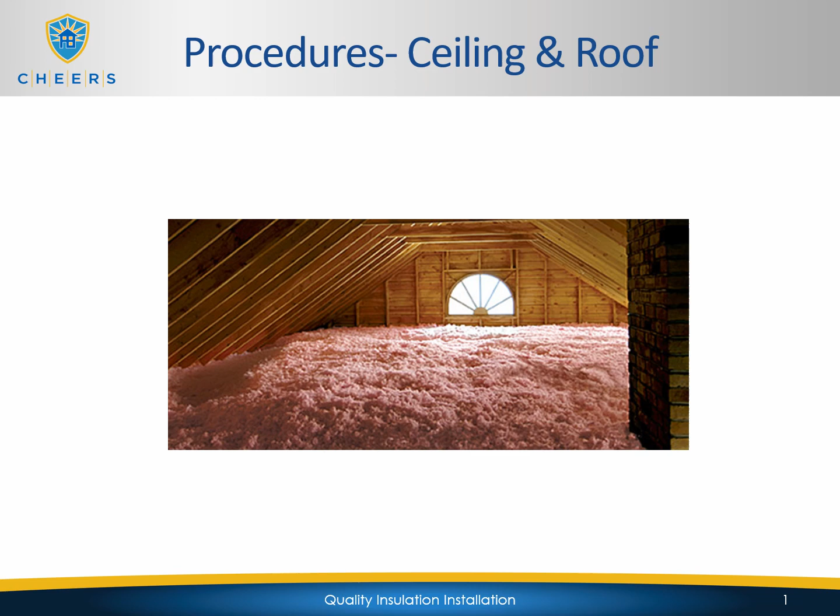As far as air sealing is concerned, hard covers or draft stops shall be placed at ceiling level over all drop ceiling areas, interior wall cavities and chases, and double walls or bump outs to keep insulation in place and stop air movement to and from unconditioned space. If hard covers or draft stops are missing or incomplete, they shall be completed before insulation is installed.

Fire caulking would be used to seal the flue to the actual draft stop itself.

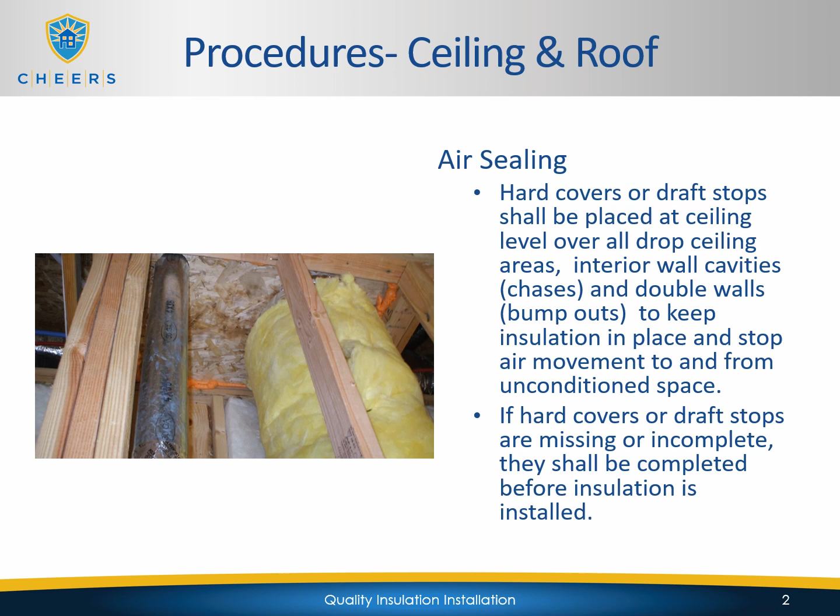Any penetration cut into the ceiling are sealed to the surrounding drywall. This includes, but is not limited to, electrical boxes, fire alarm boxes, fire sprinklers, HVAC boots, and exhaust fan housing, including all holes and seams in the housing itself.

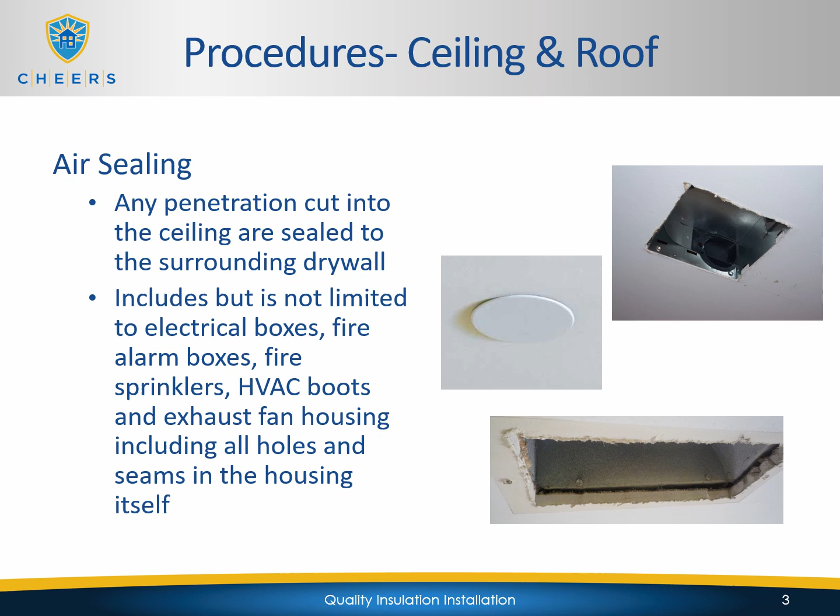If you're dealing with an unvented attic, there is a continuous air barrier at the roof deck and gable ends. All penetrations must be sealed. So if you're working in a house that has an unvented attic, the whole attic has to be completely sealed from the outside of the house.

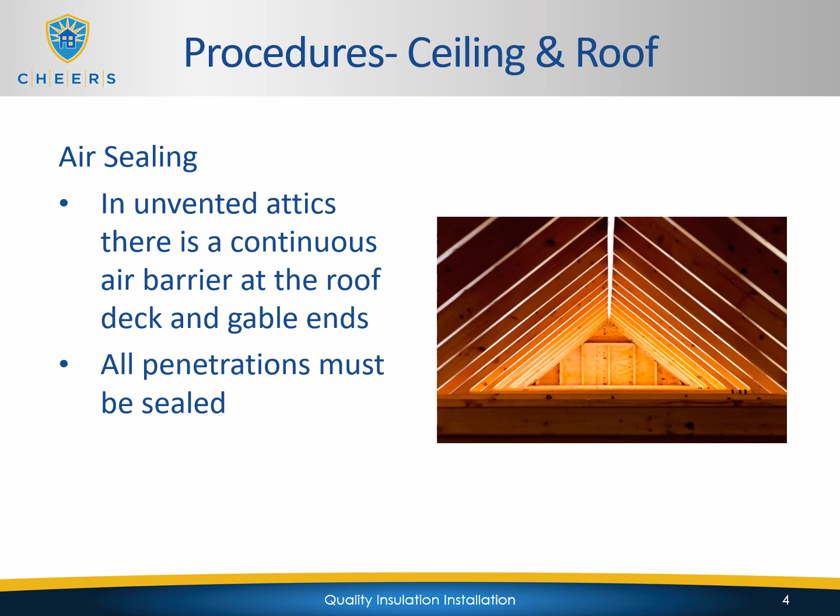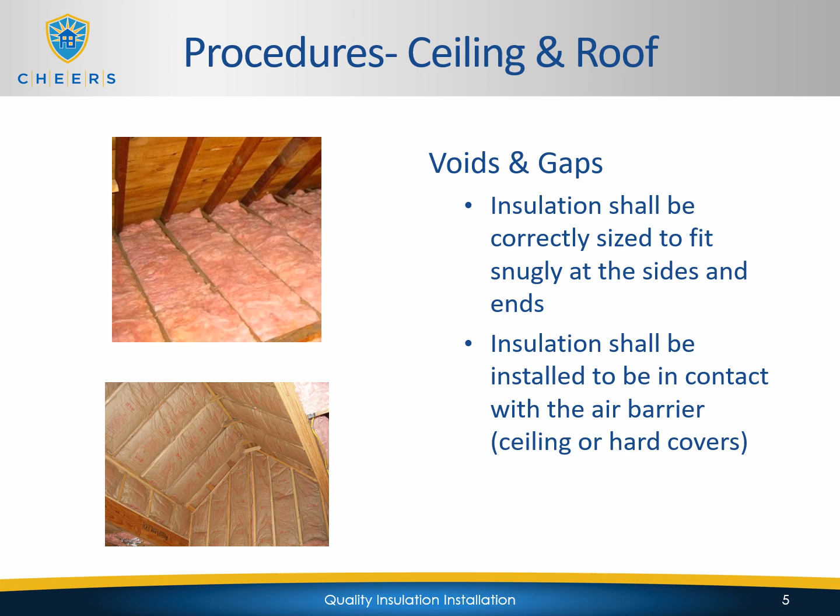Insulation shall be applied all the way to the outer edge of the wall top plate and flush against any ventilation dams or baffles. Rigid board insulation installed above the roof deck shall be applied to the outer edge of the plane of the top wall plate. Obviously, because you want to extend the insulation the furthest out as possible of the house.

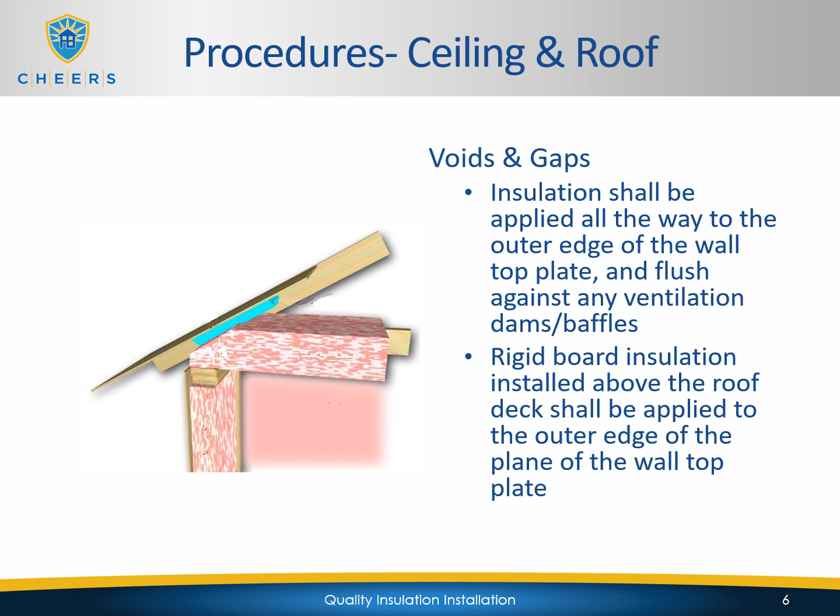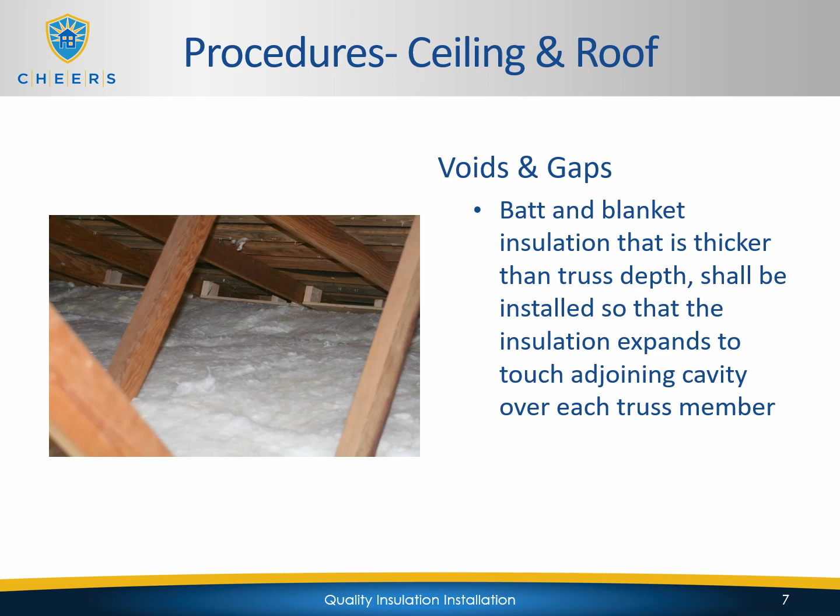For compression, where necessary, batt and blanket insulation shall be cut to fit properly. There shall be no gaps, nor shall the insulation be doubled over or compressed. When batt and blanket insulation are cut to fit a non-standard cavity, they shall be snugly fitted to fill the cavity without compression.

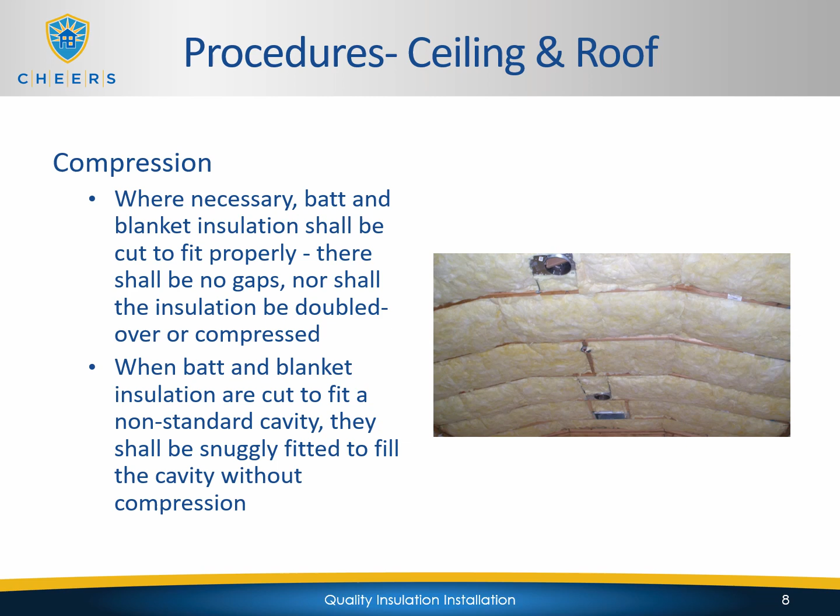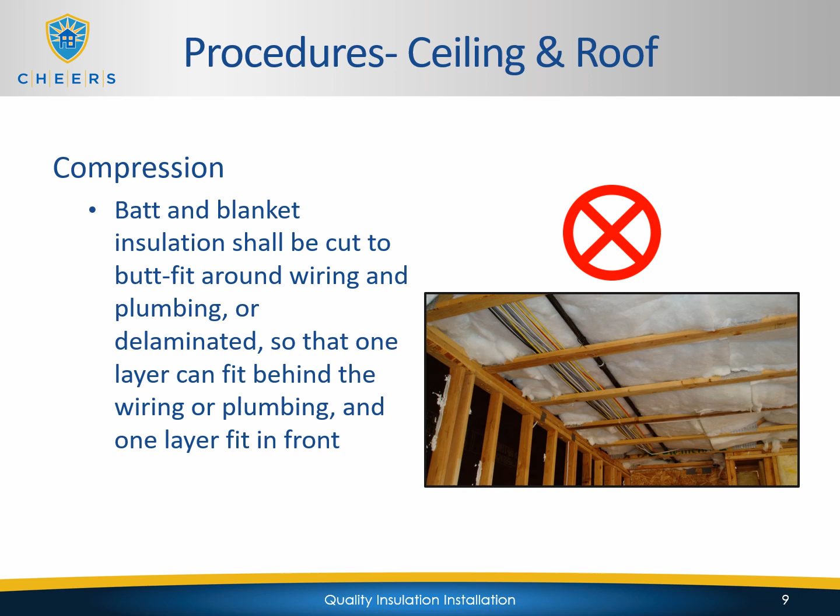Baffles shall be placed at the eaves or soffit vents of vented attics to keep insulation from blocking eave ventilation and prevent air movement under the insulation. The required net-free ventilation area shall be maintained.

So the baffle does two things. We talked about this during the Title 24 overview section. The baffle keeps insulation from covering the vents, but at the same time, it keeps the ventilation from the vents from disturbing the insulation, mainly in the case of loose fill insulation. So nonetheless, baffles have to be present, and the insulation cannot block the actual vents.

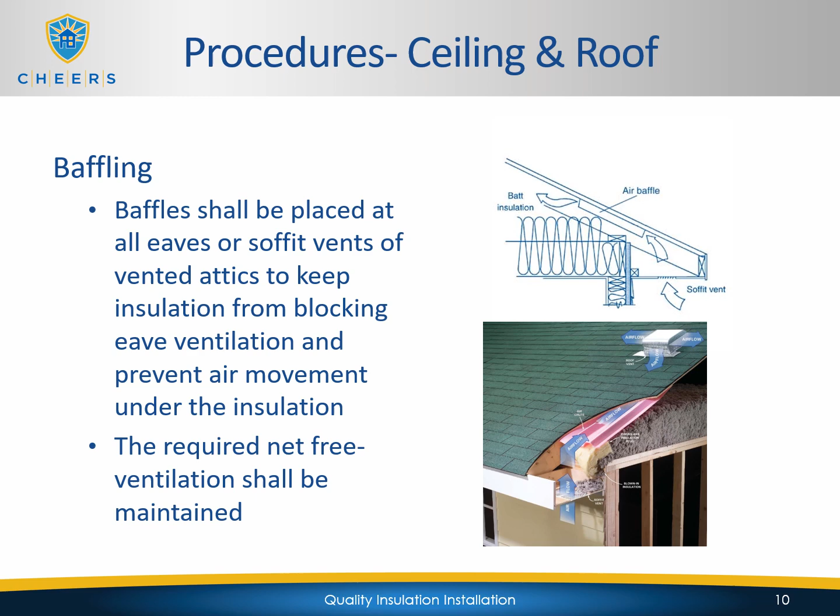Recessed light fixtures shall be rated as insulation contact and airtight, IC and AT. They shall be sealed with a gasket or caulk between the light housing and the ceiling. Insulation shall cover all recessed lighting fixtures to the same value as the ceiling. If not, an area weighted calculation is required.

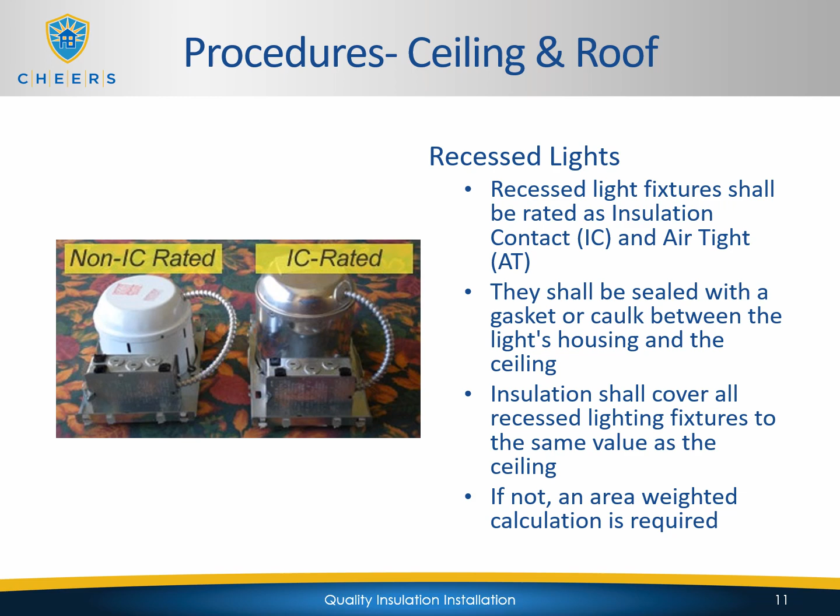Again, for chimney and flue baffles, insulation shall be kept away from combustion appliance flues and chimneys with sheet metal flashing: 1-inch distance for double wall flues and 6-inch for single wall, or in accordance with the flue manufacturer installation instructions or labels on the flue. The flashing shall be sealed to the surrounding framing with fire-rated caulk.

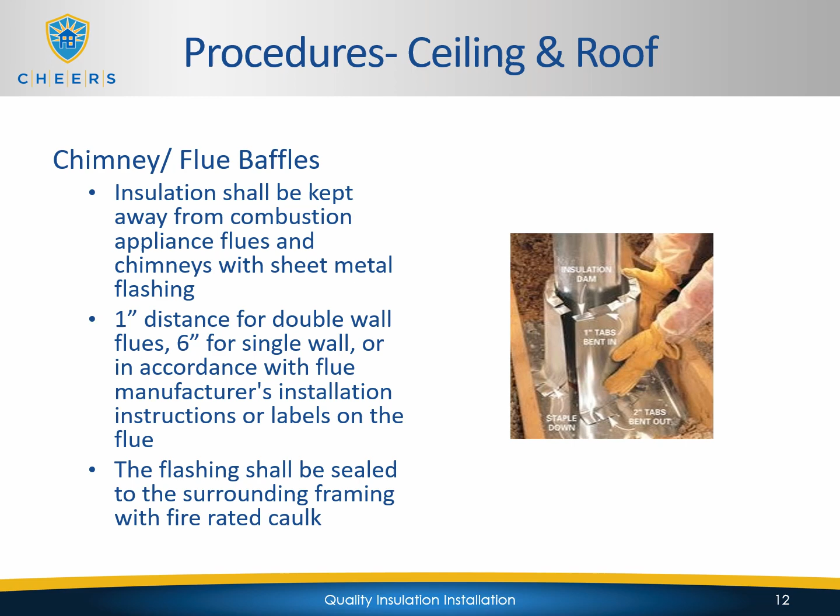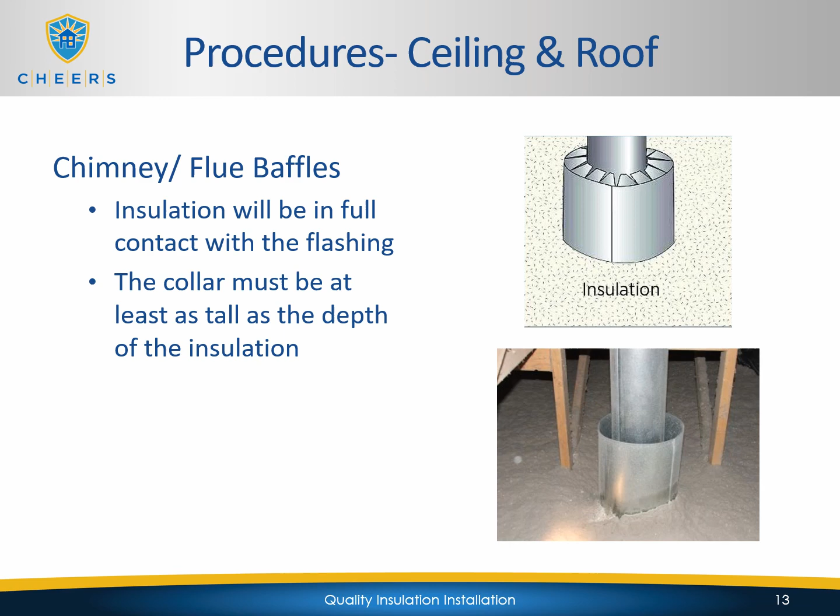When inspecting blown-in insulation, there have to be attic rulers appropriate to the material, installed and evenly distributed throughout the attic to verify the depth of the insulation. The rule is one ruler for every 250 square feet, clearly readable from the attic access. Attic rulers shall be scaled to read inches of insulation and the R value installed. You'll find these rulers throughout the attic to verify that the insulation being installed meets the inch per R value requirement.

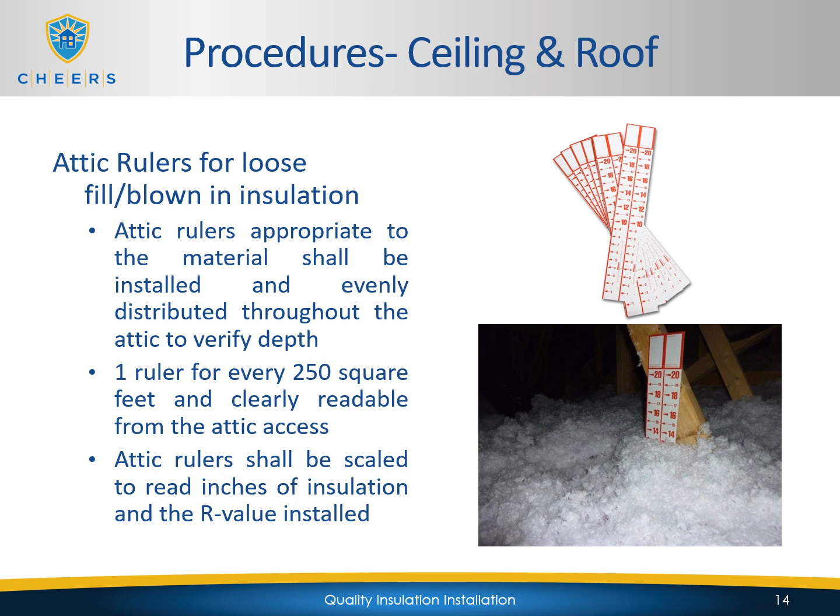For blown insulation, it shall be blown to a uniform thickness throughout the attic, with all areas meeting or exceeding the manufacturer's minimum requirements for depth and weight per square foot. So the insulation, when blown in, has to be somewhat even throughout the attic. It cannot be big waves. The picture you see here is a very good example of what blown-in insulation should look like in an attic. You can see the attic ruler is installed as well.

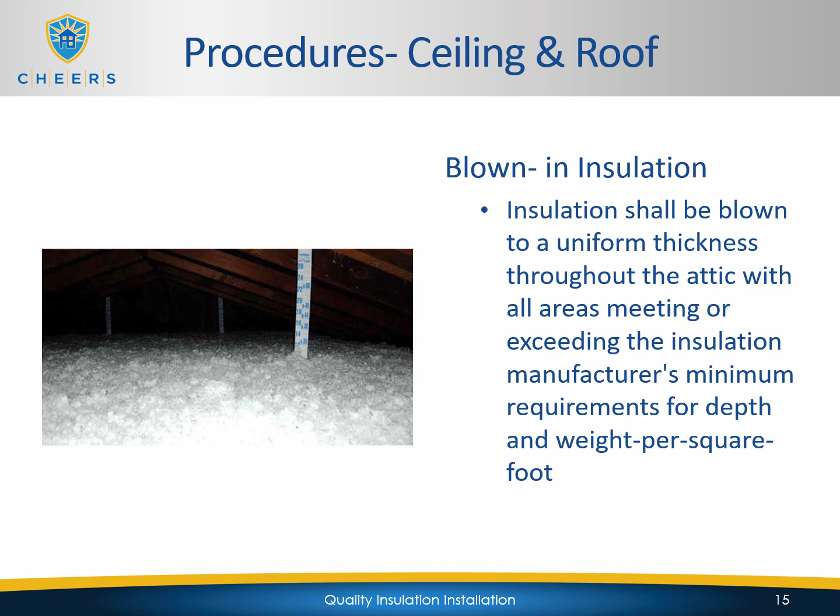So how do we measure blow-in thickness? The HERS rater shall verify that the manufacturer's minimum insulation thickness has been installed. For cellulose insulation, this verification shall take into account the time that has elapsed since the insulation was installed. At the time of installation, the insulation shall be greater than or equal to the manufacturer's minimum initial insulation thickness.

If the HERS rater does not verify the insulation thickness at the time of installation, and if the insulation has been in place less than 7 days, the insulation thickness shall be greater than the manufacturer's minimum required thickness to achieve the given R value at the time of installation, less half an inch to account for settling. If the insulation has been in place for 7 days or more, the insulation's thickness shall be greater than or equal to the manufacturer's minimum required settled thickness to achieve the given R value.

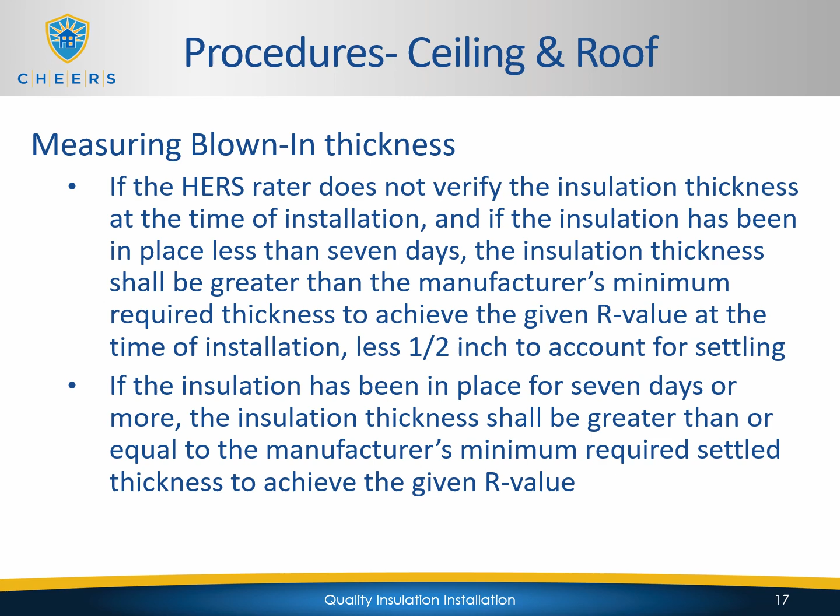The HERS rater shall verify that the manufacturer's minimum weight per square foot requirement has been met for attics insulated with loose fill insulation. Verification shall be determined using the methods of the Insulation Contractors Association of America, or ICAA, Technical Bulletin number 17 or 33. Only one sample shall be taken in the area that appears to have the least amount of insulation. The rater shall record the weight per square foot of the sample on the Certificate of Verification, or CF3R.

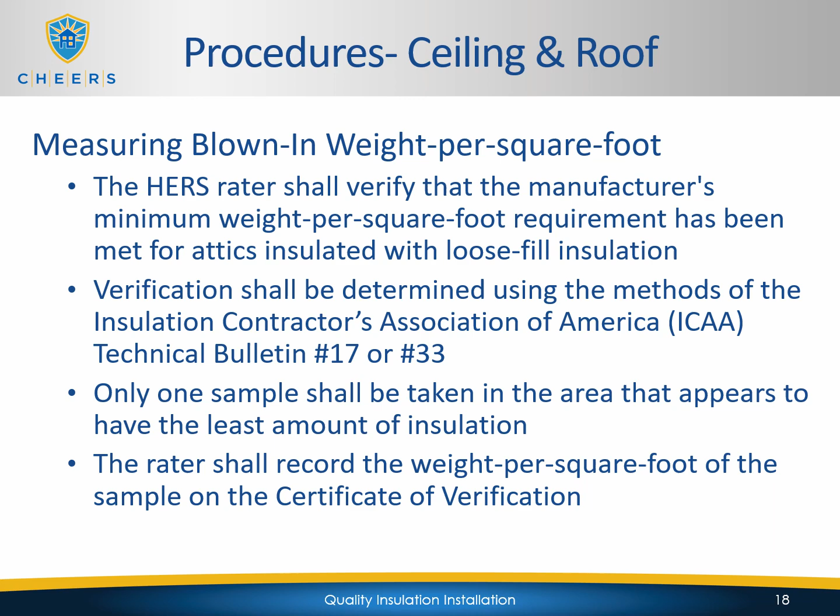The first thing you want to do is press the coring tool, also called a cookie cutter, into the insulation to its full depth. Try to avoid electrical wiring, plumbing, framing, and any other obstructions. Try to go into an area that will be completely flat at the bottom of the insulation with no obstructions.

In the pictures on the right hand side, you see the coring tool, and in the picture at the bottom, you see the coring tool pushed all the way down in full contact with what most likely was going to be the ceiling drywall from the room below.

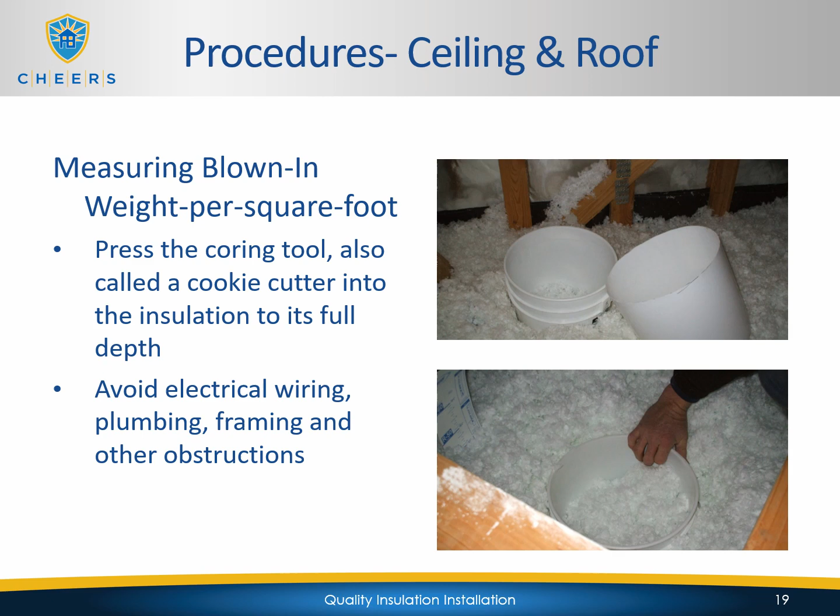You will then want to remove the insulation within the sampling tool and place it in a separate container. So you place the coring tool in the insulation, then take the insulation out of the coring tool while leaving the coring tool in the actual insulation itself.

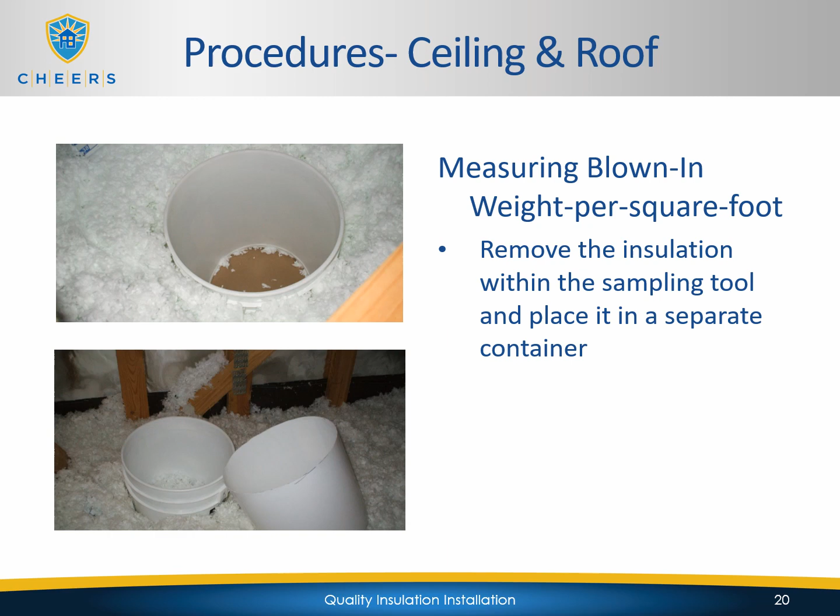You want to tare the scale with the empty sample container on it, then weigh the sample of insulation. You then want to divide the weight of the sample by the area of the coring tool in square feet.

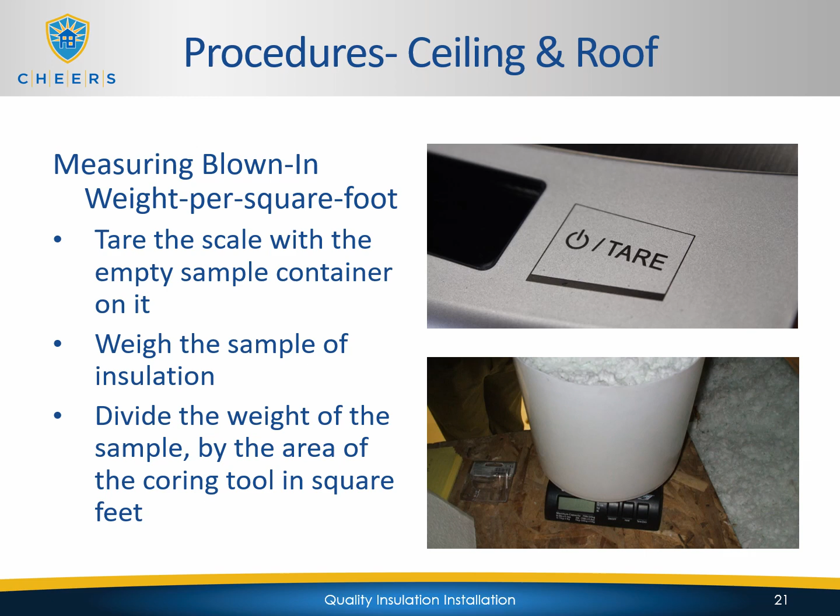Once you calculate your pounds per square foot, you will be able to compare that number to the actual manufacturer specs, which will tell you the actual R value for that insulation. The label you see here, by the way, is only a sample. This label is for example only. Each product will have its own unique specification based on the manufacturer, but it's just to give you an idea of how it works.

If you look at the fourth column down on the label, it says the minimum weight in pounds per square foot. If you go two slots down, it says 0.338. So if that was the weight you calculated off the scale, that would tell you it's an equivalent of an R19, as long as there's at least 7 inches worth of insulation there.

Again, keep in mind, this label is for example only. You would not use this label for all products. You would use the product-specific label for whatever product you're measuring.

So the measured weight per square foot or density must be greater than the manufacturer's specifications required to achieve the target R value on the CF1R. If the R value you verified matches or exceeds what's on the CF1R, you pass this particular verification.

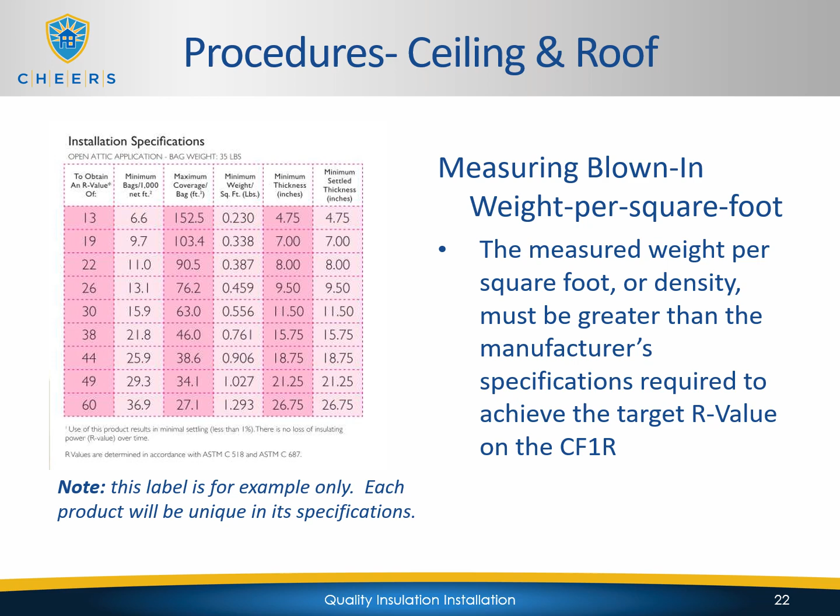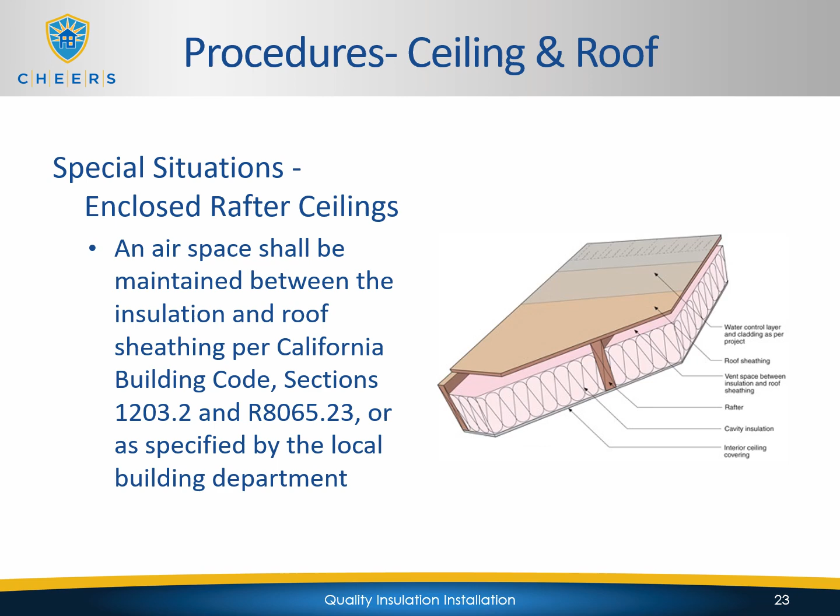As far as special situations for attics and cathedral ceilings, in unvented attics where insulation is applied directly to the underside of the roof deck, all gable ends shall be insulated to the same R value as the exterior walls as specified in the compliance documentation, CF1R, CF2R. In unvented attics where SIPs are the insulated roof structure, all gable ends shall be insulated to the same R value as the exterior walls as specified in the compliance documentation, again using the same forms we just mentioned.

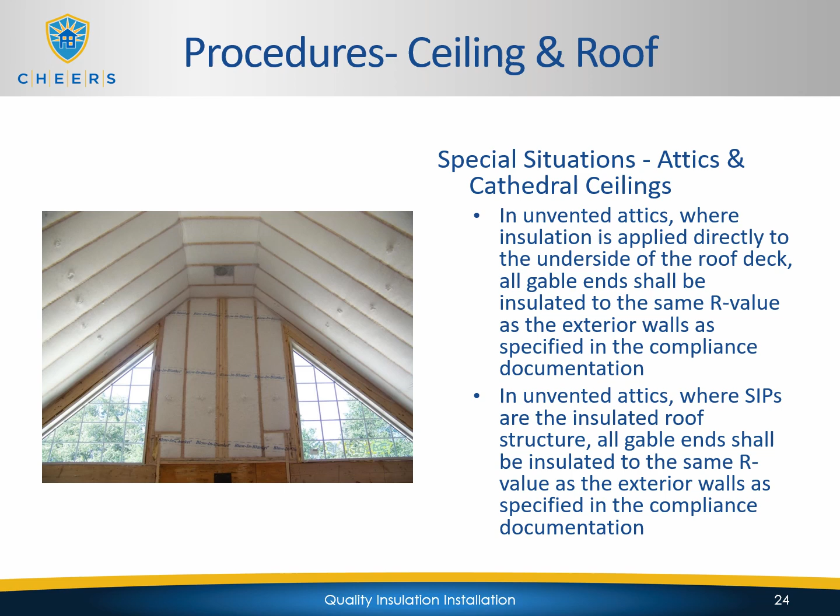For HVAC platforms, insulation shall be placed below any platform or catwalk for HVAC equipment installation and access to the same value as the ceiling insulation. Insulation shall be installed so it will be in contact with the air barrier, which is going to be the drywall. If not, an area weighted calculation is completed and turned in with a CF3R-ENV-23.

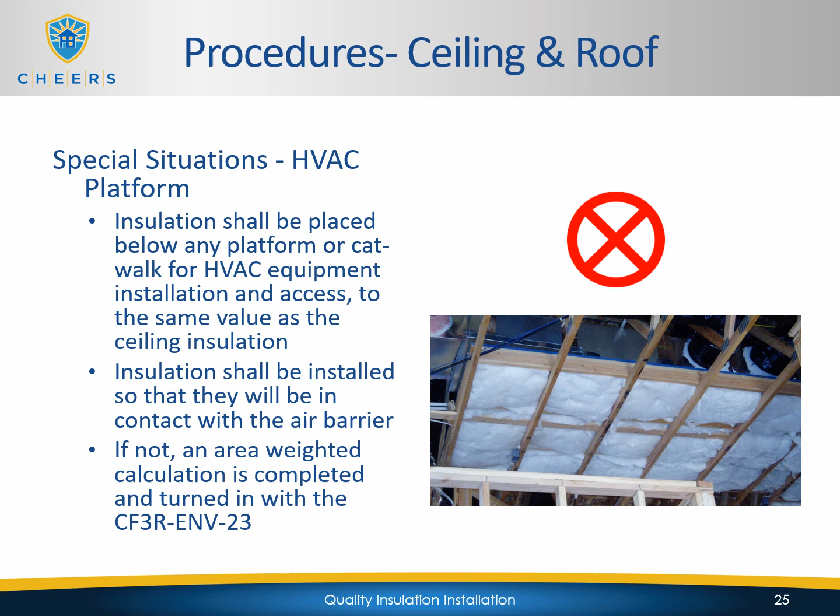For attic access, you want to permanently attach rigid board insulation, batt or blanket insulation with the same R value as the ceiling to the access door using adhesive or mechanical fasteners. The bottom of the attic access shall be gasketed to prevent air leakage of conditioned air to the unconditioned attic. Vertical access requires mechanical compression such as screws, latches, or doors.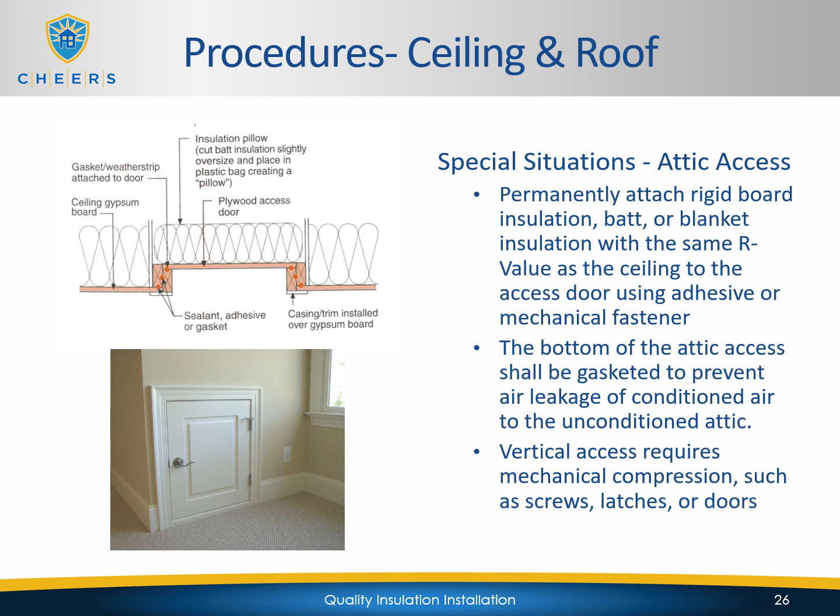The attic access must be surrounded with a dam at least the same depth as the insulation to prevent loss of ceiling insulation when the access is open.

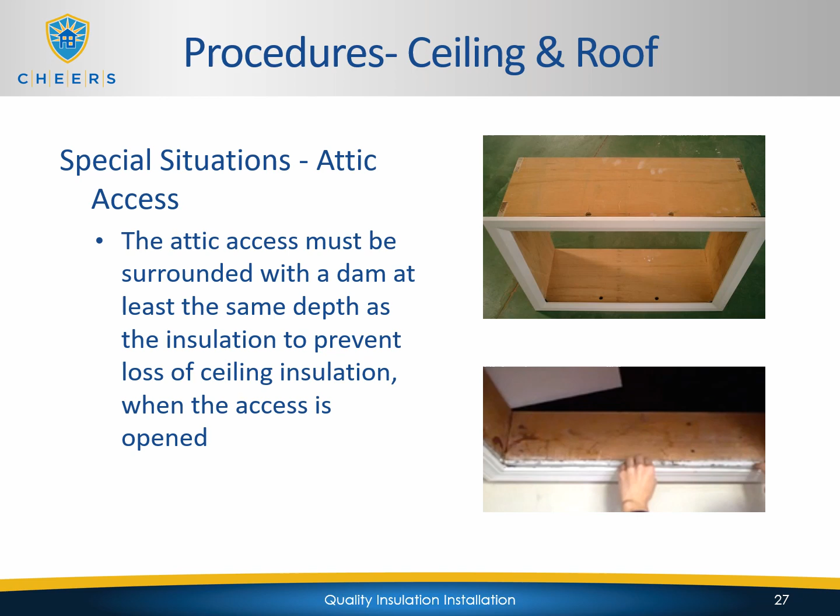Now let's look at some pictures. In this particular picture, you can see that would be a fail for some kind of draft stop. You can see the giant gap on the side of the duct. That should be sealed properly if that was an actual hardcover, so that would be a fail for the purpose of that hardcover or draft stop. They would have to plug that hole somehow and seal it properly to be defined as an air barrier.

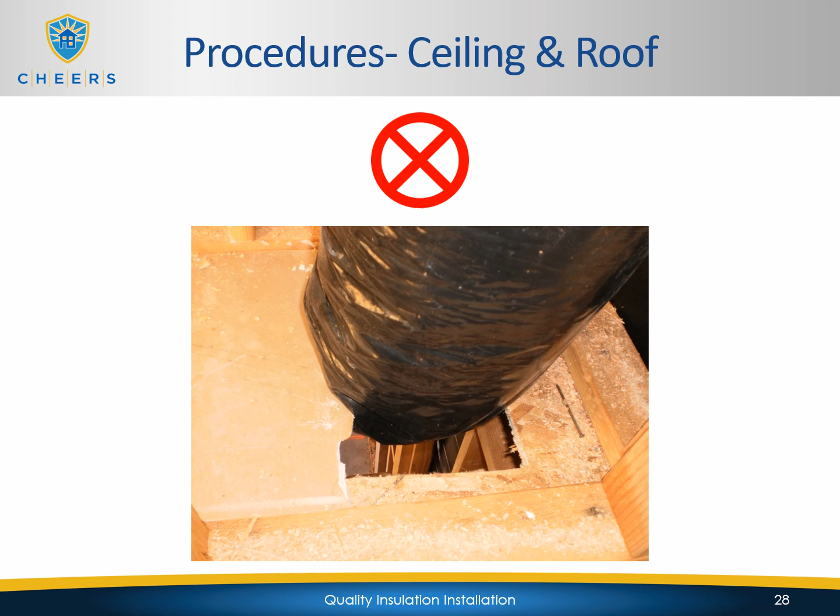Now this is an example of a good draft stop. Obviously it's sealed all the way around, keeping the insulation from coming down. On top of that, you can see the flue going through the material, and you can see that it's gasketed properly, and it also has a baffle to keep the flue away from the metal itself. Obviously, we would have to verify that behind that flashing, the flue is actually not in contact with combustible material, but nonetheless, from this angle, from this picture, it looks like it would be okay.

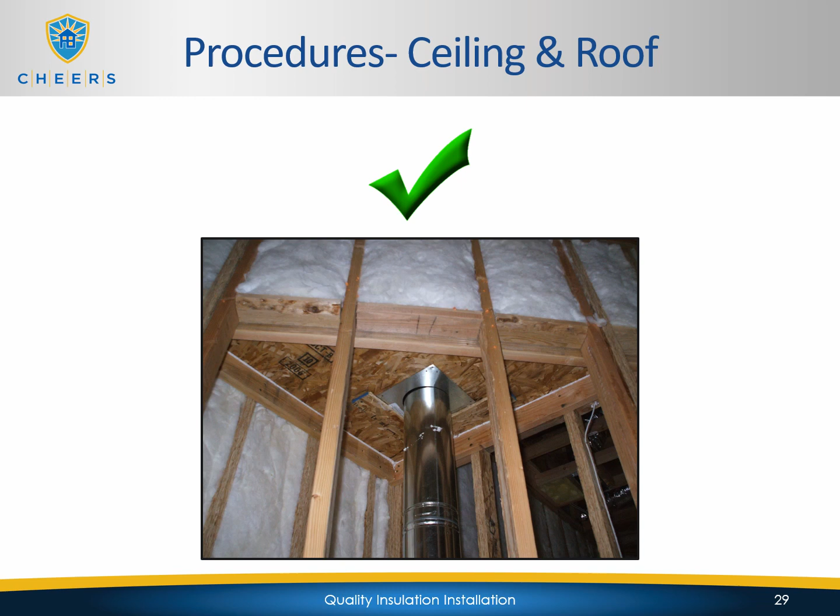Compression in ceiling insulation, obviously you can see it's wavy, it's compressed. Once the drywall goes in, it will not be in contact with the drywall, so this will be a fail.

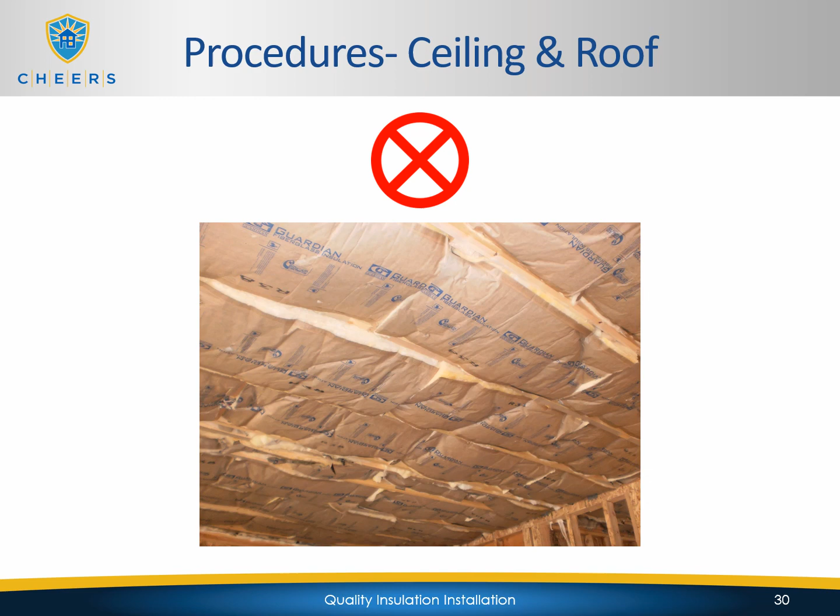This is a very good example of well-installed blown-in insulation. It's even all the way around.

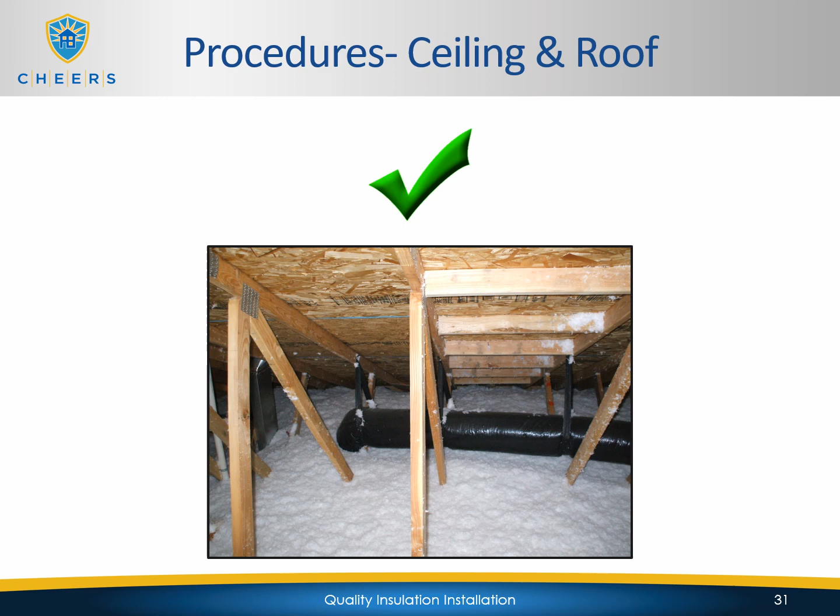Obviously, this would be a fail. We talked about delamination and compression, and obviously they haven't done any of that in this particular installation. It looks like they just laid the batts over everything else. So in this particular scenario, this would be a fail.